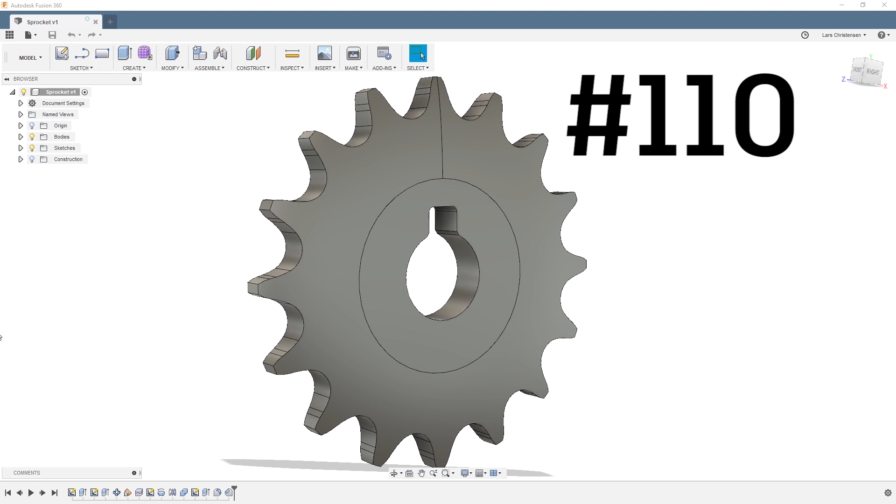Now, I should also add that in livestream 110, we did a sprocket. So you could go and dig that one up, and it might answer some of your questions in regard to gearing and how all this stuff works.

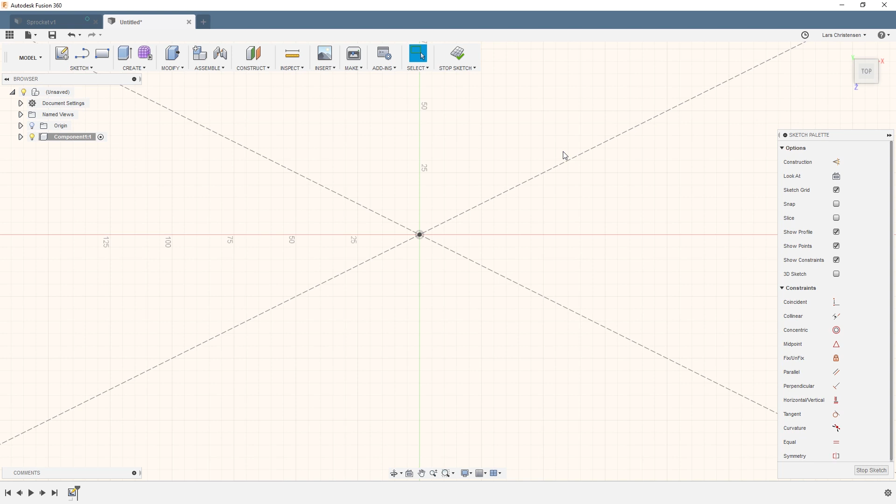One thing could also be to go and open up a new document. Let's right click and create a new component, and let's quickly create a base here. I'm going to create a center rectangle, make this one 200 by 400, and hit Q for extrude, just extrude up a little bit of a base here.

I'm going to open another sketch on top of this face, and L for line, just draw a line across. C for circle, I'm going to place a circle there, circle there. D for dimension, and let's make this one 63 millimeters in diameter.

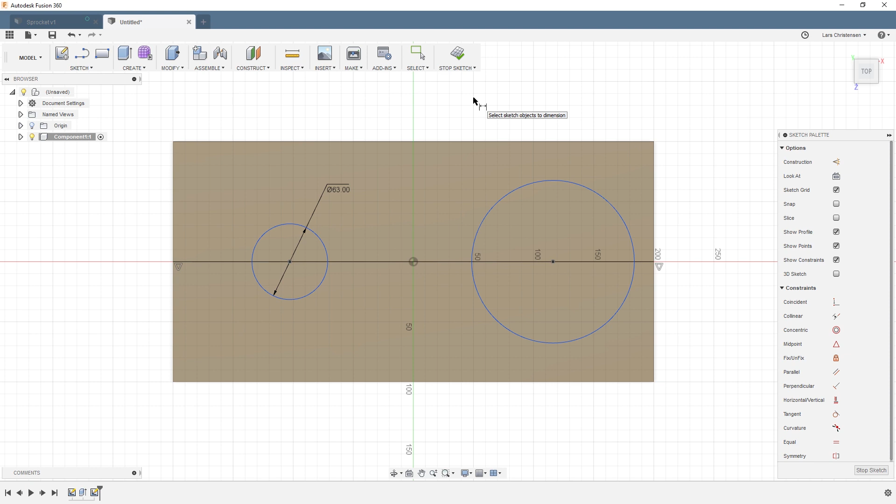Let's use the equal distance to make these two equal here. D for dimension, and let's make this 66. Let's go ahead and do 66 times 2, a little bit of math there, and let's extrude those up.

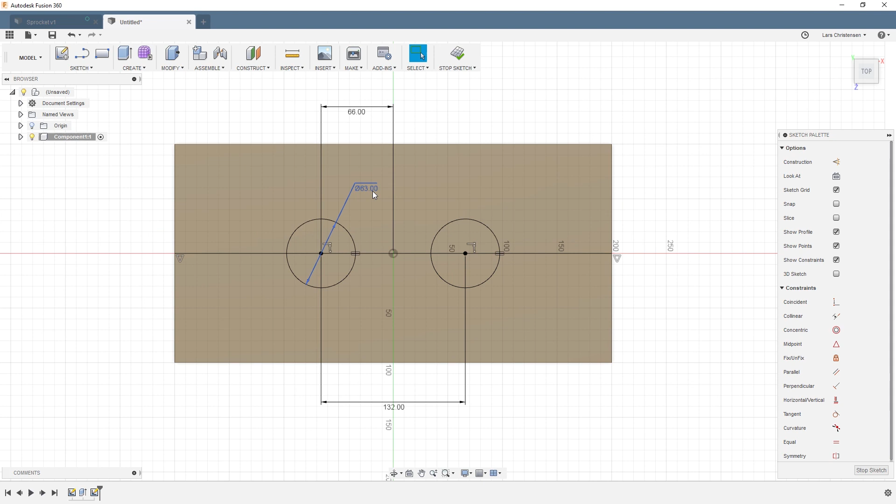Oops, I made a mistake. It's going to be 132. All right, let's extrude these up, and let's make them also 25.

And let's go out and just save this. That's fine. Let's go and insert, right click and say insert into current design. There is our sprocket. Let's just drag it out here, hit OK, and that was placed right inside this component.

I'm just going to drag it up on top so it comes outside. I had that activated, that was why the sprocket went inside of there, but I actually wanted it in the top component, so I just dragged it out.

I'm going to select this one and Control C, Control V, and that's going to copy it, so now we get two of these. All right, and let's just place these here.

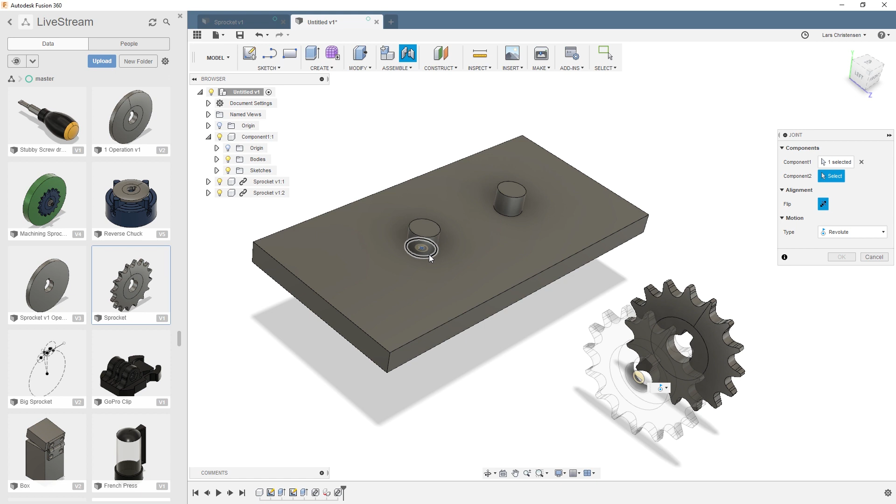So I'm going to go over and do a joint. I'm going to select this center face here and this edge here, and make sure revolute is on. That looks good. Let's do one more, click here to the center of that one to there, and now we have that one there.

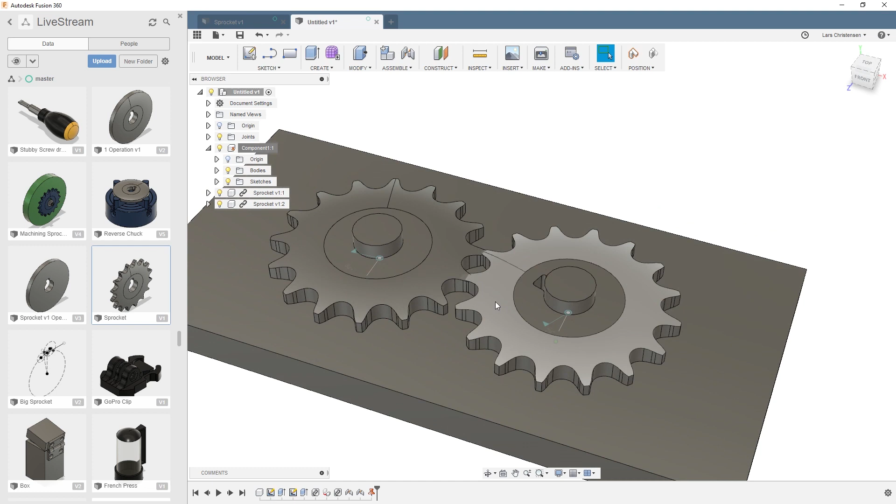So one of the things you might look at is saying, all right, now I actually want to simulate how these two gears hit each other as they go in there. One might be tempted to use the enable contact sets that you find under the assemble button. If you're using contact sets, Fusion will literally calculate and solve everything, so when that one tooth comes down and hits the other one, it's got to solve everything, including any joints and any dimensions, before it can do anything else. And that might just slow you down.

One trick instead is to go ahead and use the motion link here. So if I click on motion link, I get some components have been moved, that's because I was dragging these around. I'm just going to capture the position of it. Then I can select two joints, these two center joints right here, and as soon as I do that, you will see these gears are simulating the rotation.

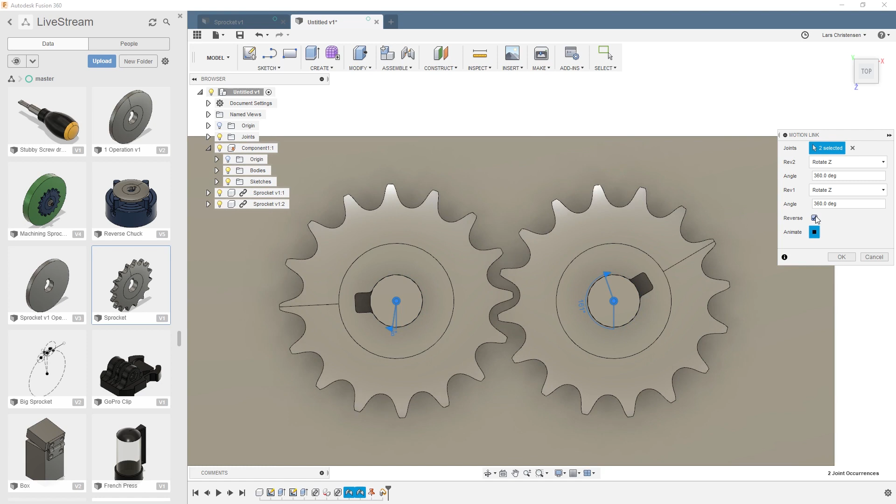Now, of course, you can see that they're kind of working against each other. But if you hit the reverse button over here, now it looks a little bit better. Now you can simulate that movement on how these gears maybe will hit each other. You might want to bring the center distance a little bit closer if you want to have it more real. I hope that was useful, Russell.

So where is the channel going to go from here? I haven't quite figured that out yet, but I knew I had to create this video to kind of get on to season 2, if you will, of the channel here.

And you know, I know that I still want to create some Fusion videos for you guys. It's probably not going to be live streams, at least in the beginning, just because the live streams, you have to schedule them and be kind of consistent, and I can't guarantee that right now, but I definitely want to create some content. I definitely want to make sure that it comes up here that is useful for you in some kind of a format. Here's the thing, everything is good. Life is good, the family is good. I still want to create content that is useful for you as a Fusion user. So with that, well,